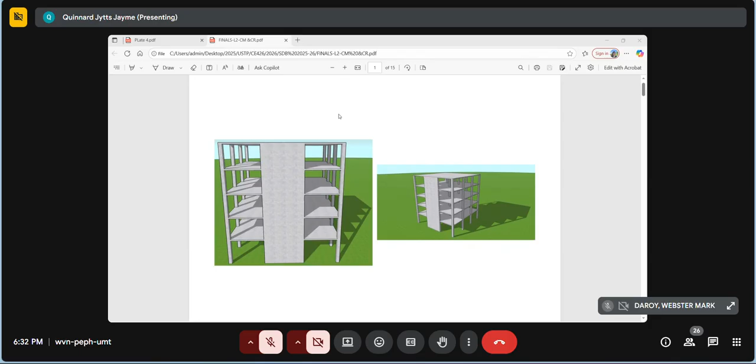First, let's talk about wall rigidities, often called stiffness. Wall rigidities determine how well a wall will react to lateral forces. The rigidity of a wall is dependent on the cross-sectional dimensions, the height of the wall, and the material it is made of.

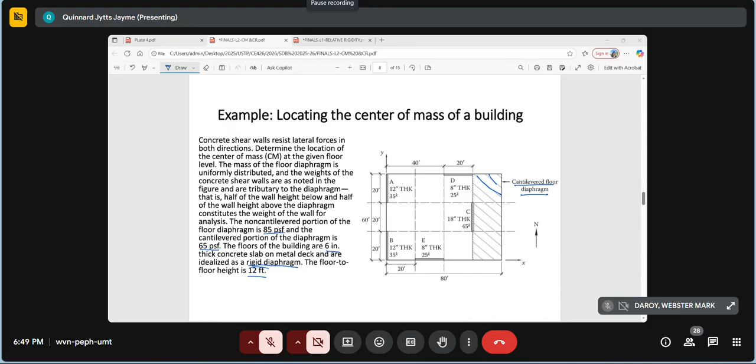So naka-detail po dito, wall A is 12 inches and 35 kips ni siya. And for wall B, 12 inches gyapon, 35 kips. C na to is 18 inches, 45 kips. D is 8 inches, 25 kips. E is 8 inches, which is 25 kips gyapon.

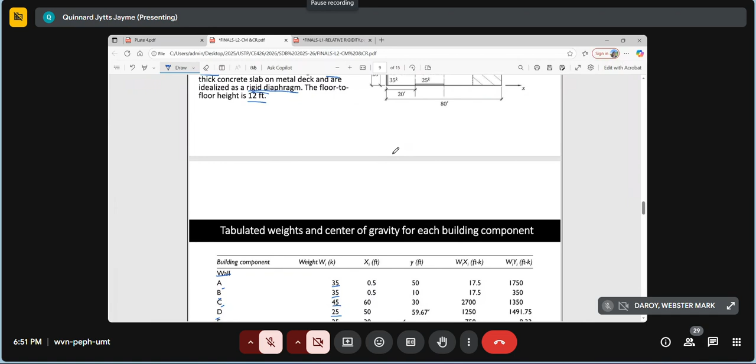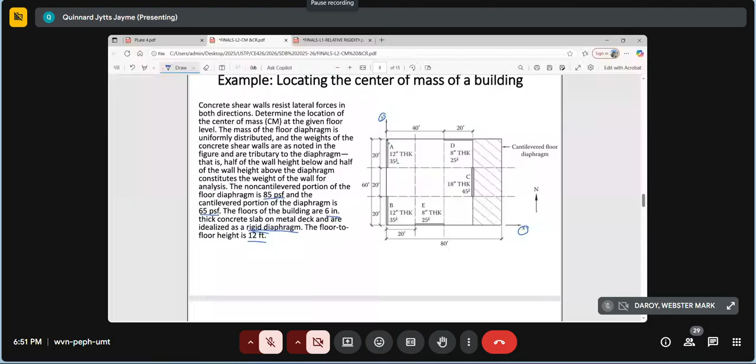Distance sa imong wall from the center sa imong wall padulong sa y-axis. Ayan, distance. So si wall A na to karon given is 12 inches. So inyong dumdumon, pag magkuha mo ani, is from the center sa imong wall. So 12 inches man ni siya. So padulong ka diri sa y-axis, no?

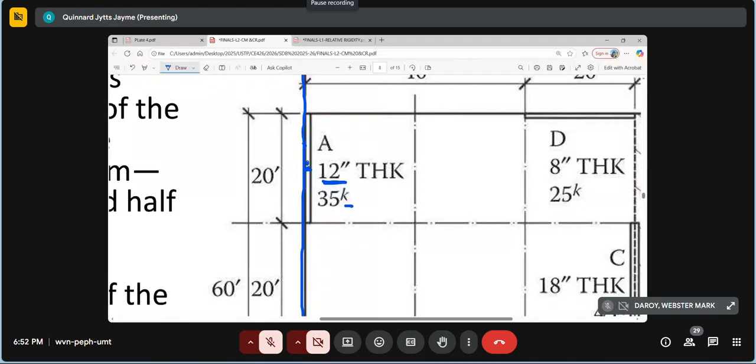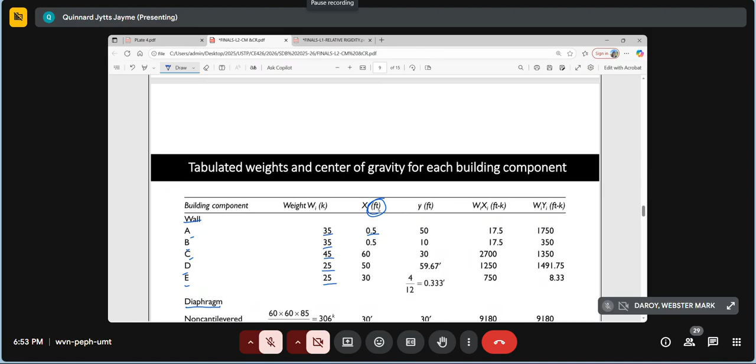Then for this wall, 12 inches, gikan mo ka sa tunga. So 6 inches na lang siya, kay half mo ka padulong dari. Padulong sa y-axis 6 inches. So 0.5. 6 inches is 0.5 feet, since 1 foot is 12 inches. So 0.5 kay 6 inches man siya.

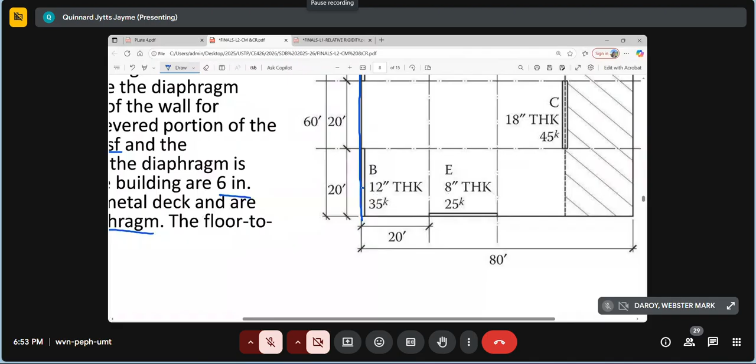Next na to is wall B. So same lang gyapon sila, no? 12 inches man, so half padulong dito sa y-axis is 6 inches. So 0.5 gyapon siya. And for wall C, tanawan ninyo, si wall C is naka-center. Ang wall nato is inside man siya, no?

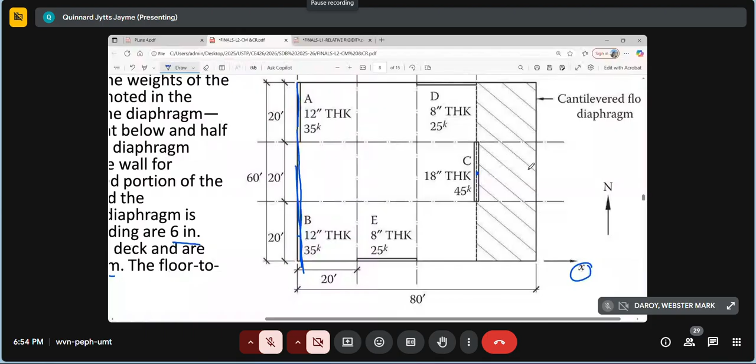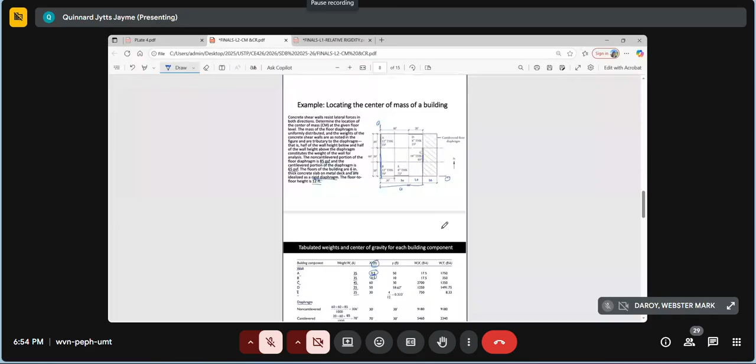Muna itong y-axis. Dili man siya center to center ang imong wall, whereas wall C is naka-center siya daan. So from this, padulong sa y-axis. So 20 man ni siya per span, total of 80. 20 plus 20 plus 20, so 60. Pag-abot mo sa table, 60.

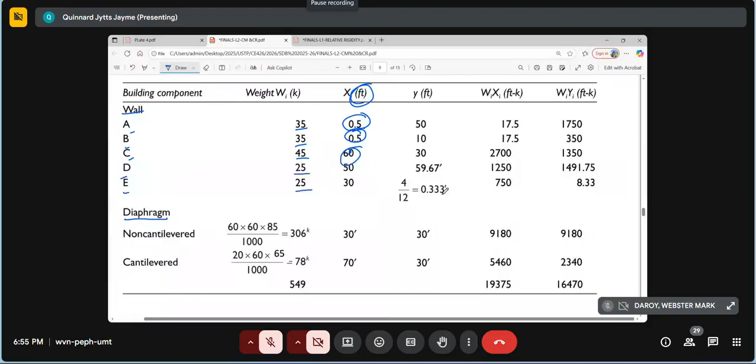And for wall D, center niya is dari. Padulong ka dari. So 40 daan and half sa 20 is 10. So 40 plus 10, 50. And for last one, wall E, center dari. Padulong sa y-axis is 20 plus 10, so 30. Simple na siya.

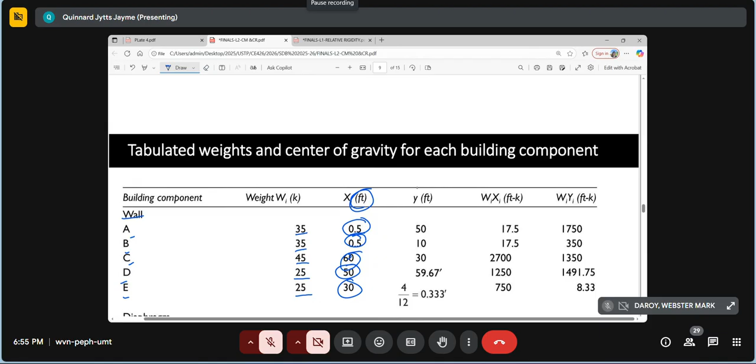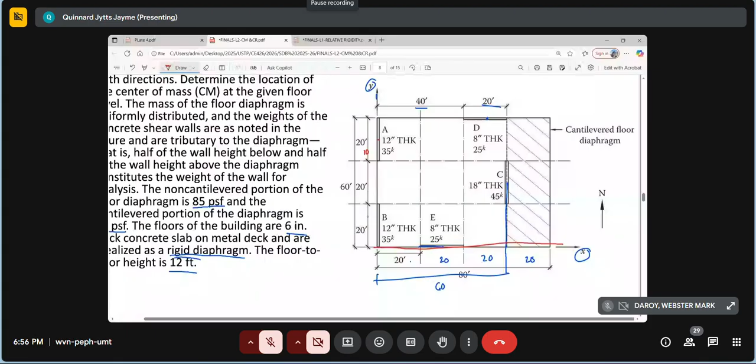And for y, opposite na po siya. Kung ganiha, padulong ka sa y-axis ang x nimo, karon sa y nimo, padulong na po ka sa x-axis. So for wall A, center, half sa 20 so 10. 10 plus 20 plus 20, so 50.

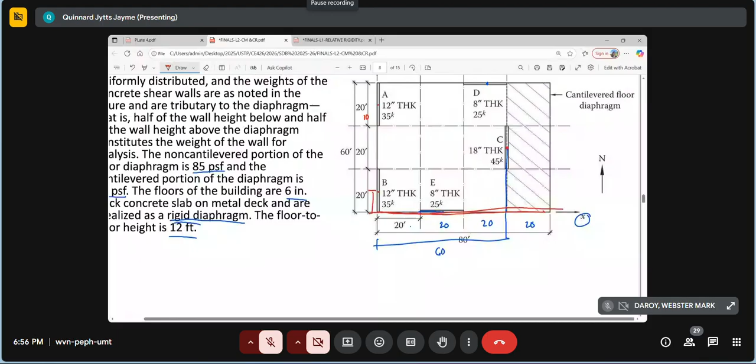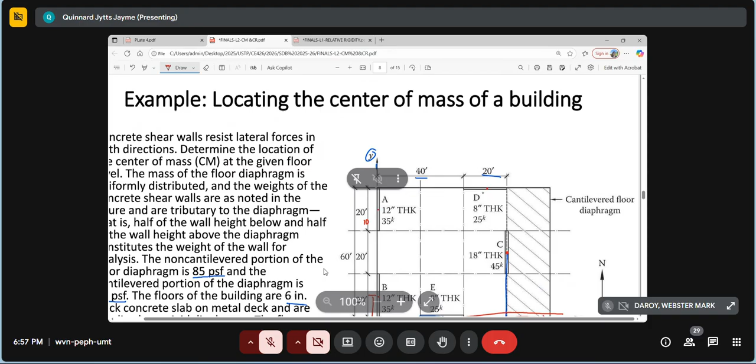So for wall B, half sa 20, padulong is 10. So 10. For wall C, center, padulong ka sa atong x-axis, no? So half sa 20, 10 plus 20, so 30. And for D, center, padulong dadto. So 8 inches man na siya. So 8 inches.

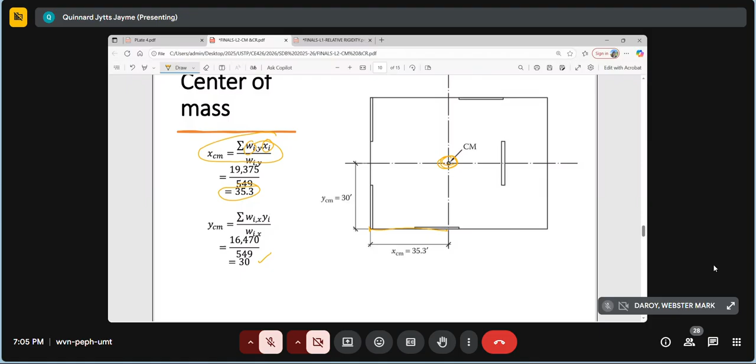So, that's for the center of mass. And next is center of rigidity. So, rigid diaphragm analysis. So, center of rigidity is the origin whereby the seismic force applied to the center of mass of the floor will rotate. So, meaning, kung asa imong center of mass, kung makakuha na kay center of rigidity, so meaning dito siya mo rotate, chance nga dito mo rotate ang imong structure.

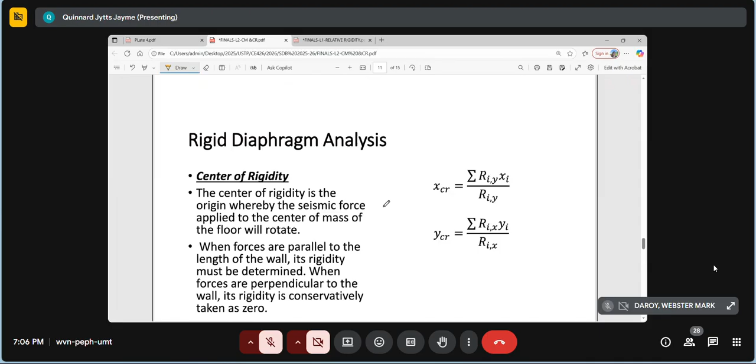So when forces are parallel to the length of the wall, its rigidity must be determined. When forces are perpendicular to the wall, its rigidity is conservatively taken as 0. So, the equations: pagkuha sa x sa center of rigidity, pareha lang ni siya. Total lang gyapon sa rigidity of xi, then divide sa rigidity.

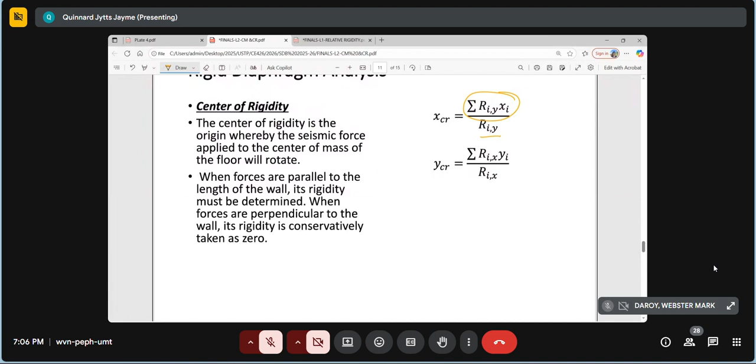So, let's have an example. Same structure or same building. For the building discussed in the previous example, determine the location of the center of rigidity and the value of the torsional rigidity J for the lateral force resisting system configuration as shown. The walls of the multi-story building in example 1 have a floor slab at the bottom and at the top of the wall at each level, which prevents rotation of the top of the wall and creates a fixed wall condition. So, fixed wall siya.

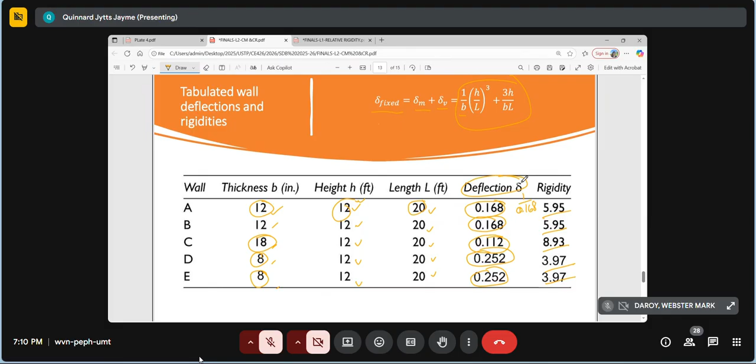And for rigidity, as I said a while ago, when getting rigidity, it's just the reciprocal of the deflection. So reciprocal, 1 over 0.168, so mao na ang 5.95. So on and so forth. Reciprocal lang. So mao na ang rigidity. Kung makuha na ang rigidity, proceed na ka sa next table.

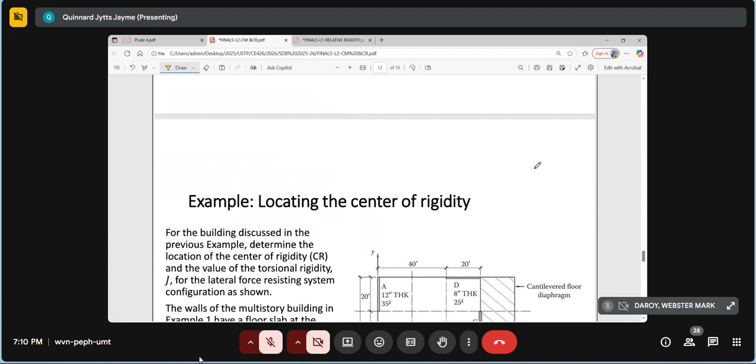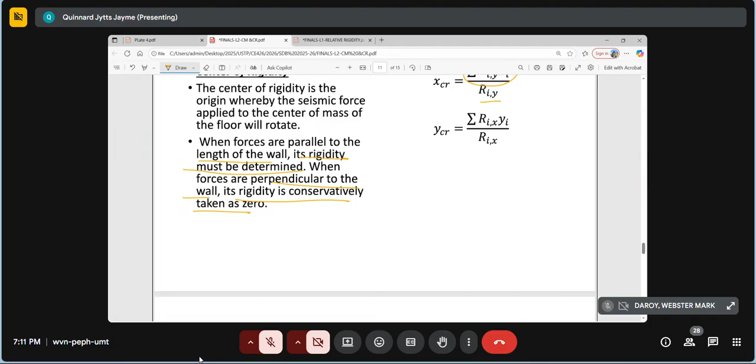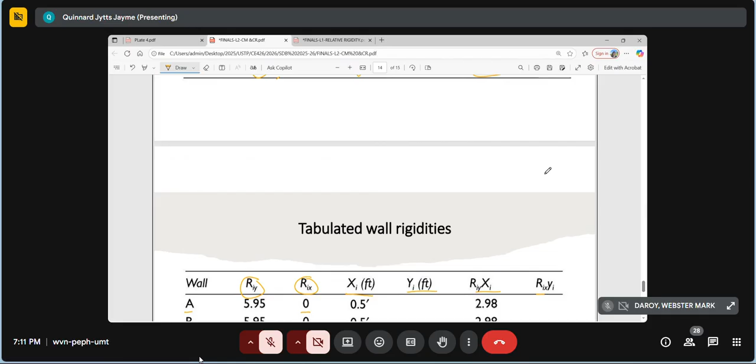When forces are parallel to the length of the wall, its rigidity must be determined. When forces are perpendicular to the wall, its rigidity is conservatively taken as 0. So meaning, makita ninyo diri nga naay mga 0. Kung 0 siya, meaning dili siya makapugong og force.